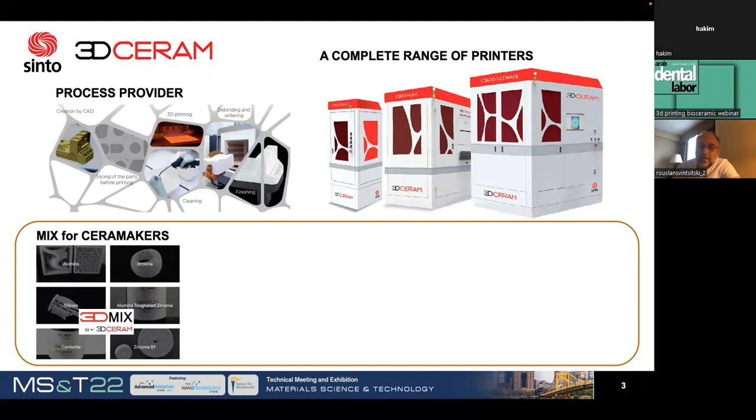Company 3D Ceram is the process provider. What does it mean? We manufacture and develop our own range of 3D ceramic printers. We develop our own slurries, oxides, non-oxides for different applications, among which biomedical applications, of course. We have developed our own software, which makes easier the preparation of the printing process and the arrangement of the parts on the printing platform. And we also accompany our customers with dedicated services which go from training, installation, commissioning, but also the development and co-engineering of some parts or applications for their specific needs.

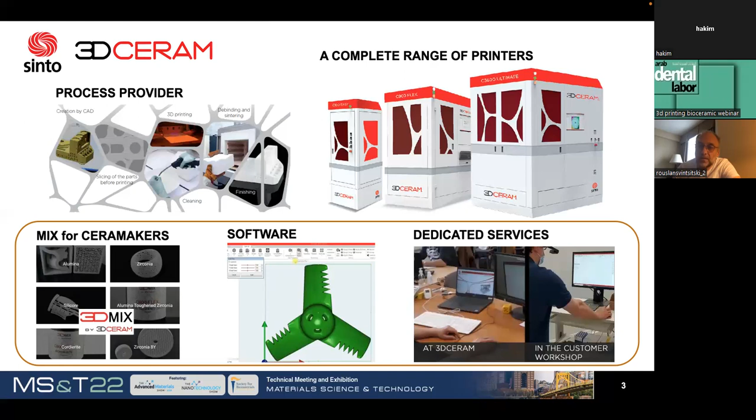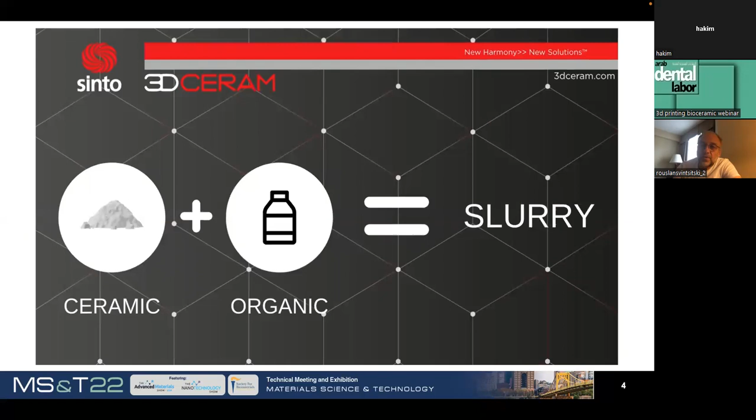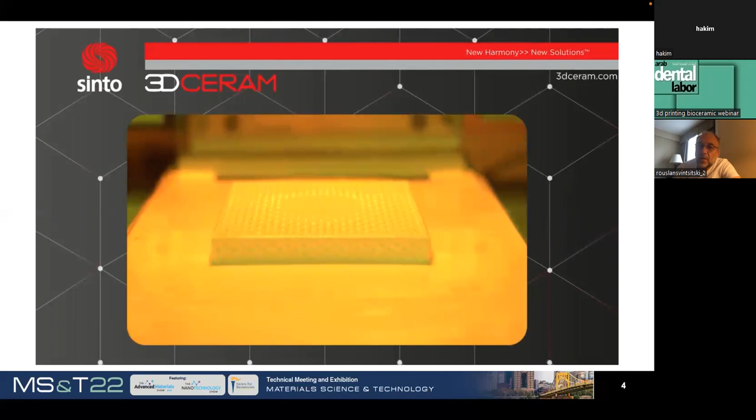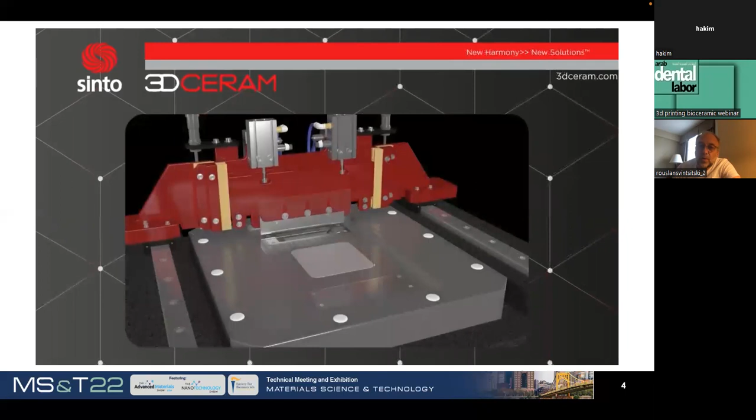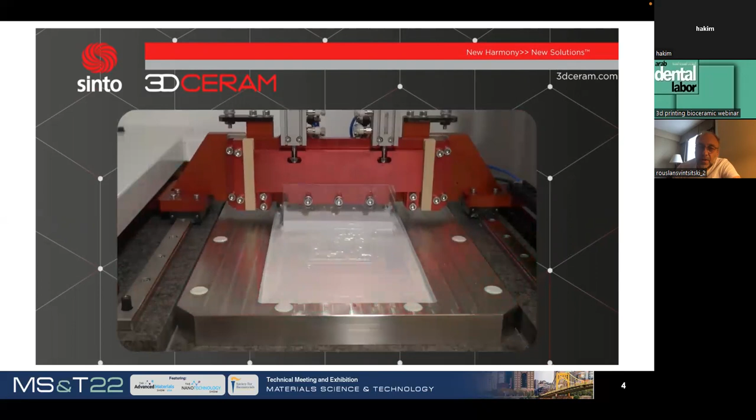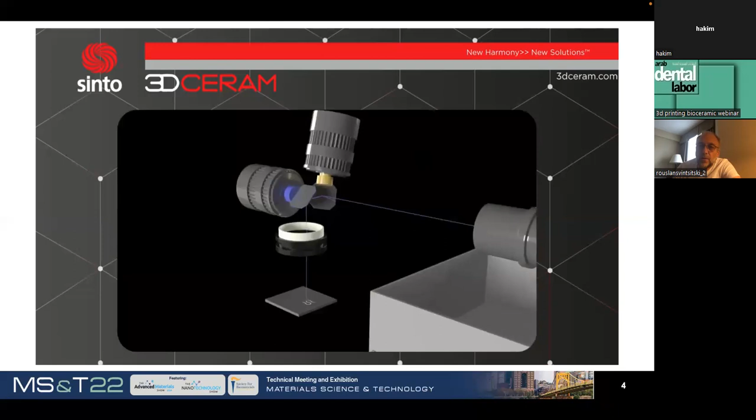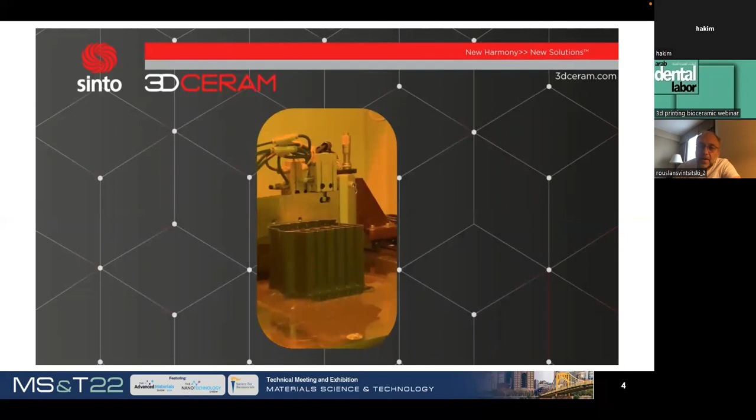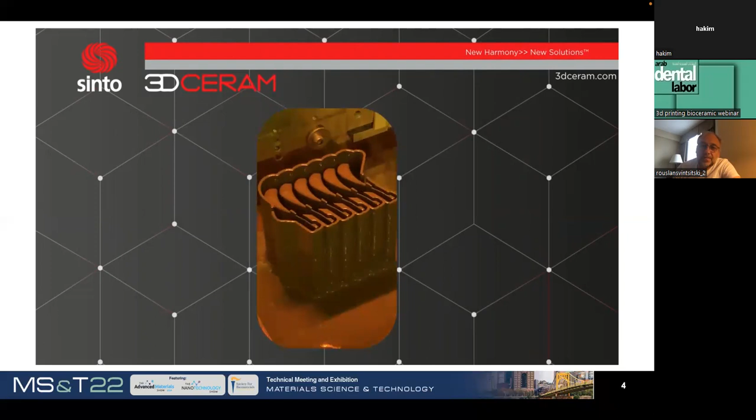Layer by layer, we dispatch this material, like you can see in the machine now, and to make it shaped, to make it hard, we use a UV laser of 405 nanometers of wavelength to cure each point all over the surface of the printing. And the parts are built layer by layer from bottom to top. And then when the printing is finished, as you can see here, the shaped parts are already printed and have to be post-processed.

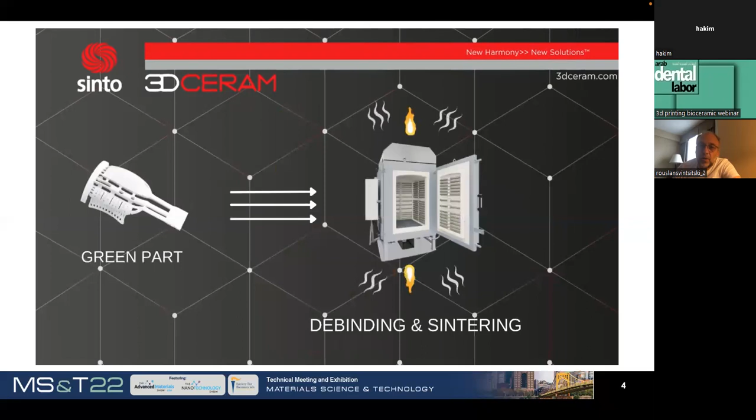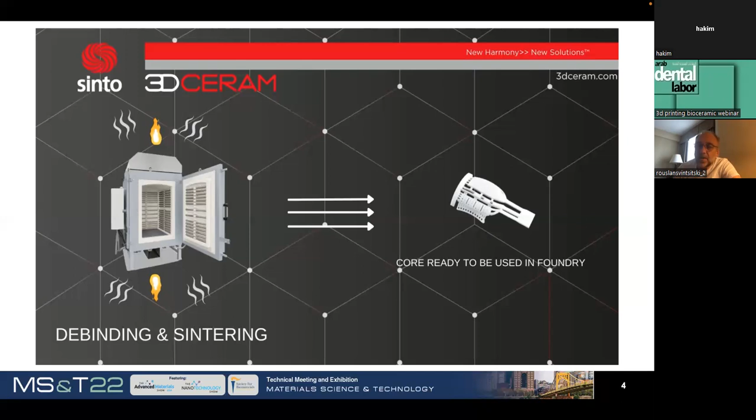Because 3D printing is just the first step of the whole process. When you have the part, you clean it, you have to debind it and to sinter it. And only after sintering, you have the ready to use part. Here you have the example of a foundry core used in investment casting, but it can be a dental crown, a dental implant, a skull implant, etc. Debinding removes the organic material, this binder which was mixed with the ceramic powder, and sintering welds the ceramic particles between themselves to give the final properties to the ceramic materials.

Now about this very application. We are speaking zirconia. People involved in this field know that zirconia is one of the biomaterials used for its biocompatibility, for its strength, for its chemical inertness. It's used a lot for orthopedic and dental implants, more and more for dental implants, in fact.

First, we used alumina, but starting from the 90s, we used 3% yttria zirconia. It was used up to the early 2000s because we noticed some aging issues with this material. What kind of aging issues? In fact, because of yttria, we create oxygen vacancies in this material, and under the impact of low temperature and water, which is typically the environment inside the human body, there is degradation of the material, slow degradation, but degradation.

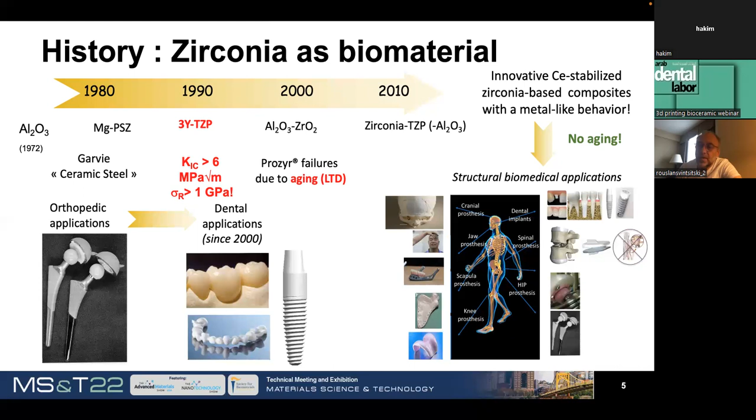That's why we and our colleagues, our competitors, other people involved in this field, started to use slightly different materials: alumina toughened zirconia, zirconia toughened alumina, and now we will speak about a new material which will fix these issues of aging, that we have developed together with the laboratory Matéis in France and the Institute INSA in Lyon in France as well.

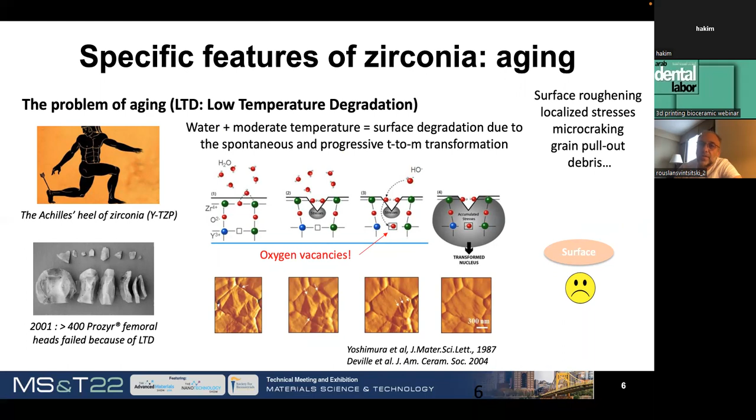Here you have this low temperature degradation explanation. It acts on the structure itself of the material, and you can see in the left bottom corner of the picture the orthopedic femoral heads, the failure which was noticed in 2001, and which was caused by this low temperature degradation. So the roughness of the surface of the part is degrading, and it leads to the total damage of the implant, which is not good for the human body, of course. When you have some cracks, when you don't have a reliable structure, you cannot implant these kinds of parts.

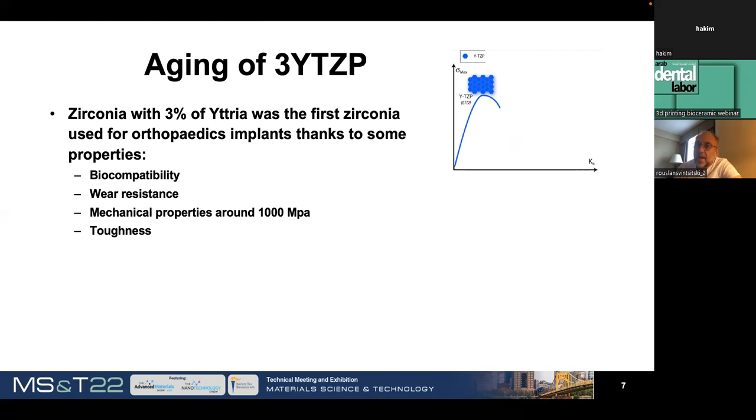Of course, zirconia itself is also called ceramic steel because it's wear resistant. As I told before, it's biocompatible. It has perfect mechanical properties, strength about 1000 MPa, and it has some toughness. But as I told you, in very early 2000, it stopped due to some breakages and damages of the implant we had to understand, to explain, and to remedy.

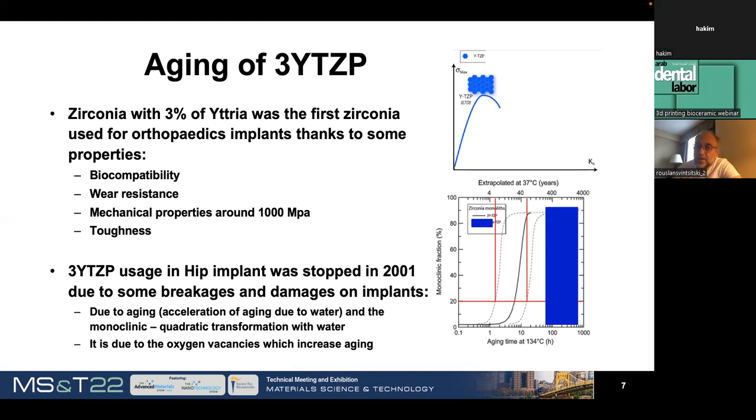When you do the simulation of this aging of 3% yttria zirconia, we can see that usually the test is done at 134 degrees C, and depending on the time you see this degradation, you can calculate the theoretical extrapolated time of aging for low temperature at 37 degrees, human body temperature. And you can notice that 3% yttria zirconia lasts less than 10 years. You can see this on this diagram in the right bottom corner of the slide.

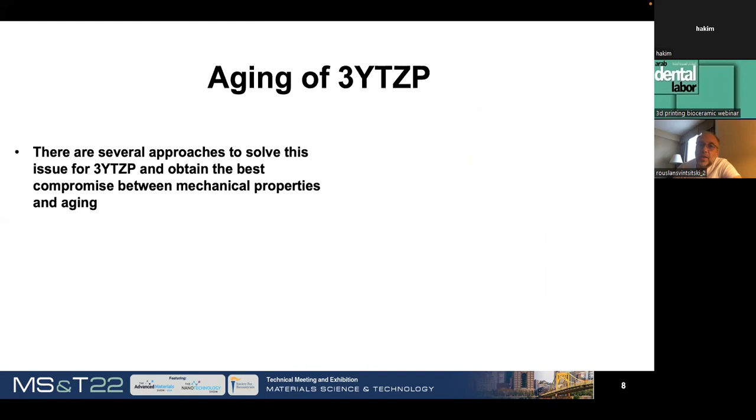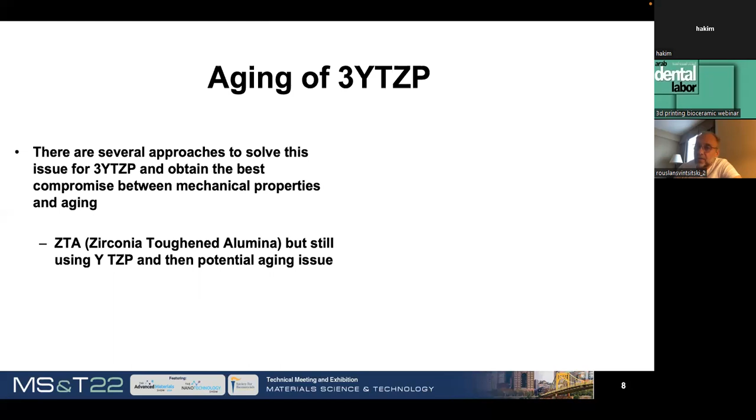So how to fix this issue with the aging of 3% yttria zirconia? There were several approaches. First, as I told you, starting from early 2000, and people are still using these materials, we developed some materials which are combinations of alumina and zirconia: alumina toughened zirconia, or zirconia toughened alumina. But these formulations still use yttria, which is the main issue in this formulation, and yttria will lead to the aging.

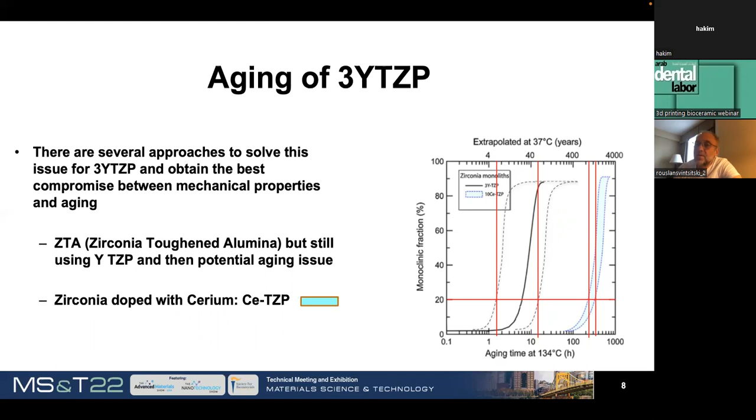So that's why we had to replace yttria by some other doping agent, and this agent was identified as cerium, because the calculation of the aging time with cerium gives very nice results. We are speaking about 400 years of aging extrapolated to the human body temperature at 37 degrees. But what about other properties of this material? Because aging is okay, but as I told you, zirconia was used for wear resistance, for the toughness, for the strength. So do we keep these properties with the new material?

To do this research, we did a cooperative research program with the laboratory Matéis and the Lyon Institute INSA. All of this was supervised by a National Research Center in France, CNRS. The main goal of this study, which was also managed by Mr. Jérôme Chevalier, known in the field of ceramic implantology, was to develop a new ceramic material for orthopedic application which will have fewer aging issues than traditionally used zirconia, but which will also have the same or equivalent properties as traditionally pressed zirconia. The traditional conventional method, mostly used in this field, is called cold isostatic pressing, CIP.

So this was our reference to develop the new material, not only for cold isostatic pressing, but also for additive manufacturing. Because additive manufacturing, as you may know, brings a new dimension into this field. We can do very fancy shapes with no tooling in very fast time compared to the conventional process.

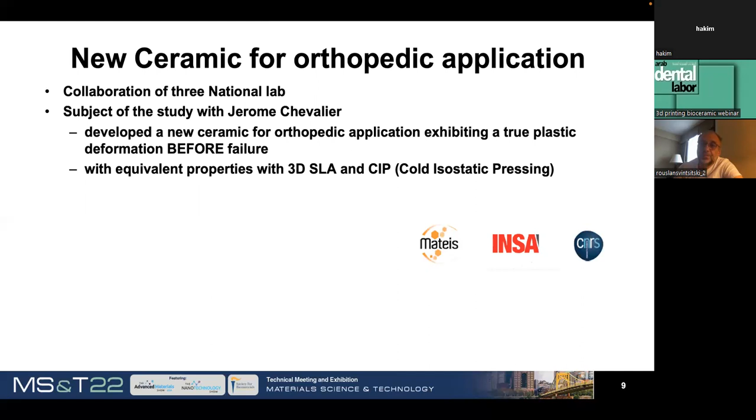Our company, as I told you, is a process provider, so we are developing our own mixes, and we have dozens of different oxides and non-oxides used in different fields. For medical use, we developed very high purity, very fine alumina, for example. We have developed alumina toughened zirconia, zirconia toughened alumina, zirconia, and hydroxyapatite, bone substitution for bone implants, skull implants, maxillofacial surgery, orthopedics. We developed TCP, tricalcium phosphate, used also for the same needs; it's a resorbable material.

We have also developed some non-oxides, used more and more in implantology, like silicon nitride. So we have some experience, skill, and expertise for development, and that's why we were asked to accompany this project. And we also do some development on demand for our customers, where they use some special mix or special powders, or they develop something for very special, secret, or sensitive applications like nuclear, military, etc.

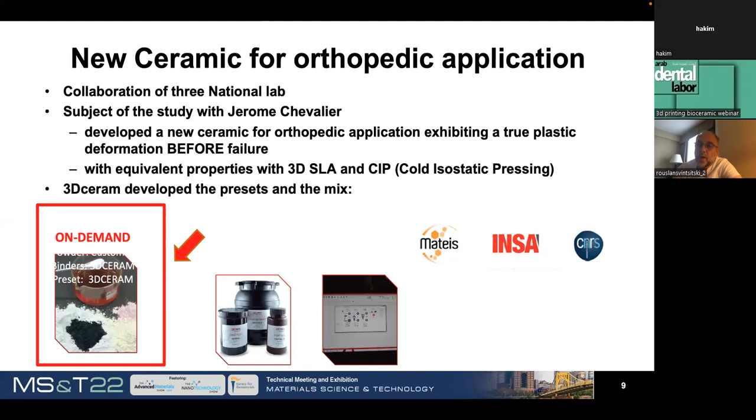So this project was implemented in the frame of on-demand service, and it took about, let's say, 12 months to do this job with all the tests performed by Mateis. First, when we identified this cerium-doped zirconia, we could find that strength of the material was very low compared to the yttria zirconia. Yes, we won in toughness, as you can see on this diagram. Strength is the Y axis, and toughness is X. So it's toughness in relation with strength.

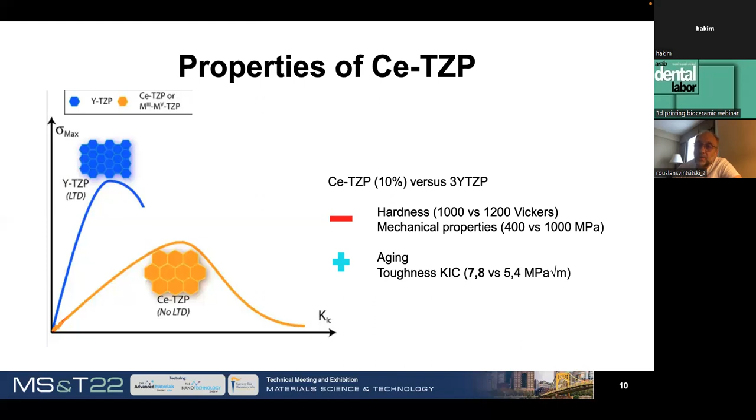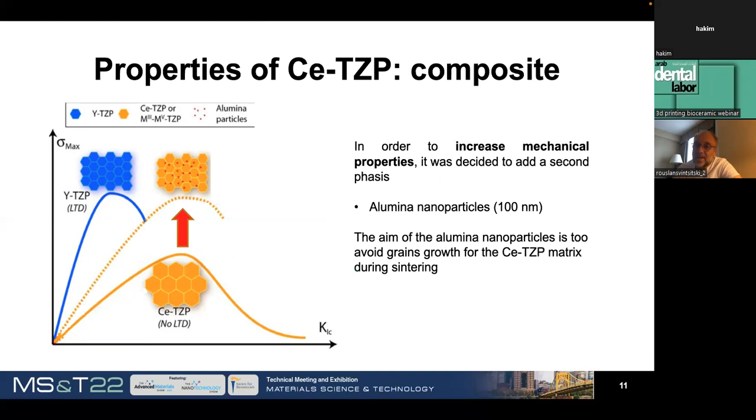So we had to add something to the mix to increase the strength, at least to be comparable to the strength of the yttria, and to increase a little bit more the toughness. To do this, first, we had to introduce alumina nanoparticles, very fine particles of alumina, to this mix to increase the strength of the material, but it didn't increase the toughness. So to increase the toughness, we had to use some whiskers or platelets from strontium aluminate, and these whiskers could increase the toughness of the materials.

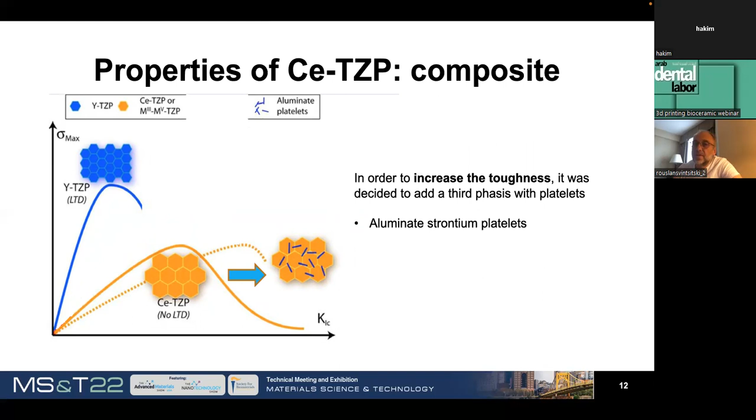So altogether, this provided us the possibility to develop the target material you can see on the diagram, which at the same time has good strength and good toughness. This material is composed of 84% in volume of cerium zirconia, about 8% in volume of alumina, and about 8% in volume of strontium aluminate platelets or whiskers.

Now we have to see if this material was printable, which is another challenge, because as I explained to you, we print this powder mixed with the photosensitive binder. So we have to be able to recoat this material. We have to be able to cure or to polymerize this material with a UV laser. And we have to be able to build some shapes. I mean, this material has to be cohesive, has to be shapeable, and it's a real challenge of the printing expertise we have in-house.

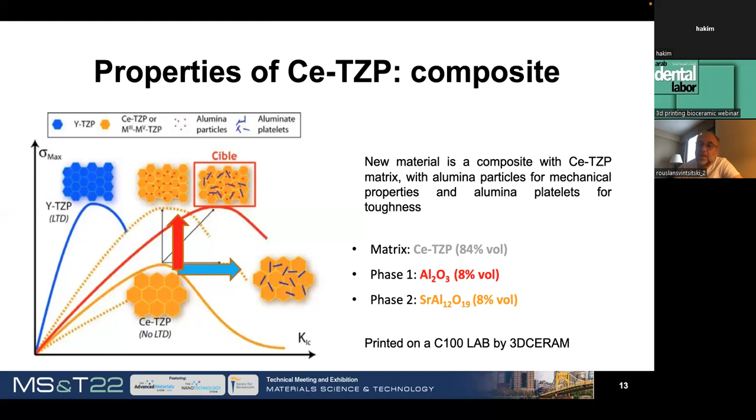It was developed, it was done. We act on the presets. We could develop some new parameters for the printer to deal with this challenge, and we could print some test bars and some discs first to see the behavior of the printing step. But as I told you, the printing is just the first step of the total production process. So how will the debinding and sintering impact this? And this is another challenge for which we have to have ceramic expertise.

And that's why I explained to you that the company started with the ceramic engineers, and our roots, our genesis, is ceramics. So having this ceramic knowledge, this ceramic expertise, these resources in-house helped a lot to develop these post-process steps, which is sintering mainly. Because sintering regime, sintering temperature, soaking time change a lot the property of the material itself.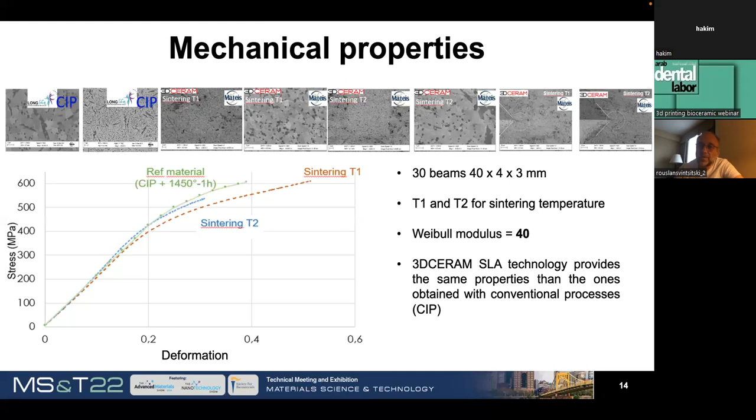So I explained about the aging, toughness, strength, the other mechanical properties, but what about the deformation? Because you know, in the dental industry or implants, ceramic is considered a brittle material, it's not a plastic material, it's not like your plastic or rubber. You cannot bend it; when you bend it, you just break it. So the challenge and the characterization target was to understand how defect resistant this material is.

Typically, we use this Vickers test where you have a point tool. You give the shock on the surface of the ceramic material, and you see the smallest shock which damages the whole part. The diagram is a little bit complicated, but what is interesting to understand is this inclined surface, which is at the border of plastic transformation of the material. The bigger this surface is, the more plastic the material is.

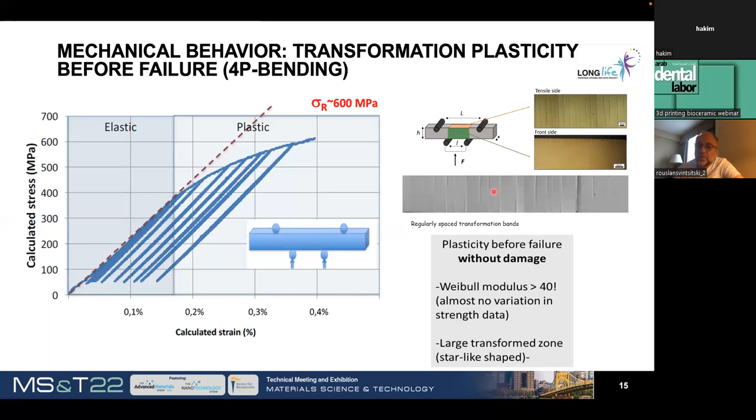So it means that on this diagram, when we tested this new material, ceria-doped zirconia material, we could obtain the ceramic, the behavior of which is much better than for traditionally used zirconia. It means that with this Weibull modulus of 40, with this strength and toughness, we could obtain a material which is closer to cast iron than to ceramics.

Here on this diagram, you can see 3 yttria zirconia in the blue area, and the orange one is the new ceria-doped zirconia composite, which allows a critical defect tested by Vickers method of 100 microns instead of only 1 micron of critical defect for the traditionally used zirconia. This picture on the right gives you the understanding of what I'm speaking about. It means that in some way you can even bend this ceramic material a little bit, which is really new for this field. At least the critical defect is 100 times more than the critical defect of traditionally used material.

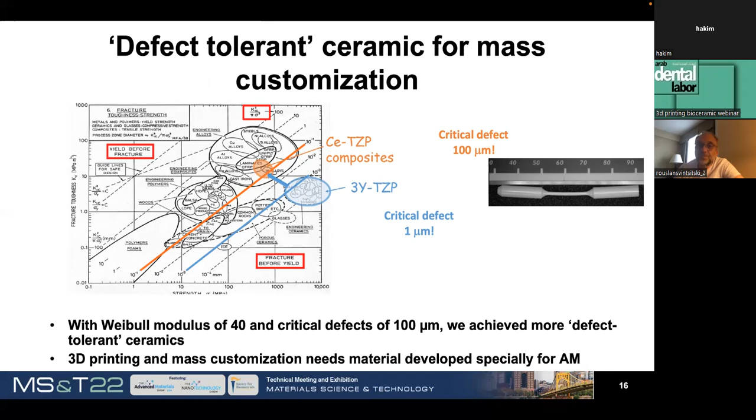So the conclusions of this study, which was implemented with Mateis, and this collaboration allowed to join the expertise of materials from this national lab and expertise of 3D printing and ceramic behavior from us: we could develop the material properties after sintering, so of the final advanced ceramic, the same properties, even better than for the traditionally used cold isostatic pressing method. And this is very interesting for the industrial people, if you want to go to the industrial integration of this, not only research, because from the beginning our company started industrial integration.

So these printers were developed to go easily from the small one, the small size of the printer we have, it's 100, 100, 150 millimeters, so we can print fancy things already on this. But we can also scale up the production more easily to the medium range printer, which is 320, 200 millimeters, and to the big one, which is the biggest one in the world, it's 600 on 600 on 300. All of them use the same slurry. All of them use the same lasers. All of them use the same interface. So it's very easy to scale up, to integrate industrially the product you develop in lab to industrial production.

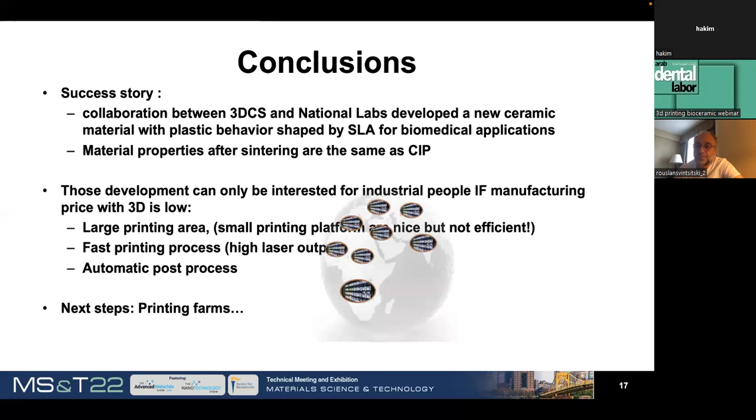So fast printing process, large printing area, easy use of the printer will help to introduce this technology at the industrial level. And of course, when we speak industry, we speak automation, because these kinds of parts need to be very repeatable in quality. So human factor impact has to be reduced. So in the future, we are developing the concept of printing farms with the automation of the unloading process, with the automation of the slurry filtering process, to make this process really industrial. Not only standalone printers, but a network of printers working in harmony in the printing farm. So that's all about the material.